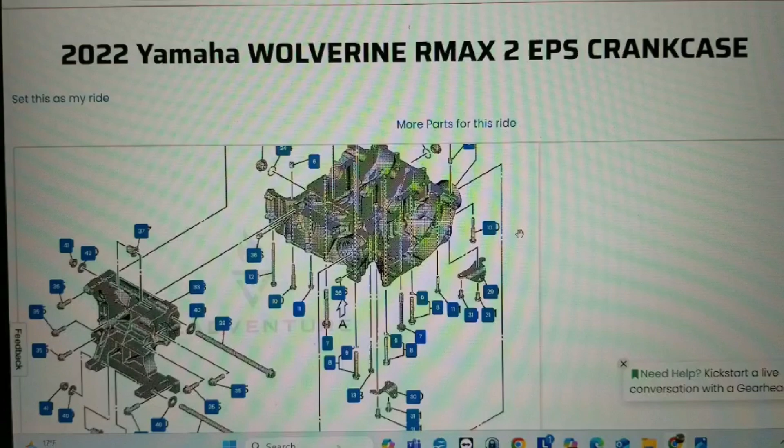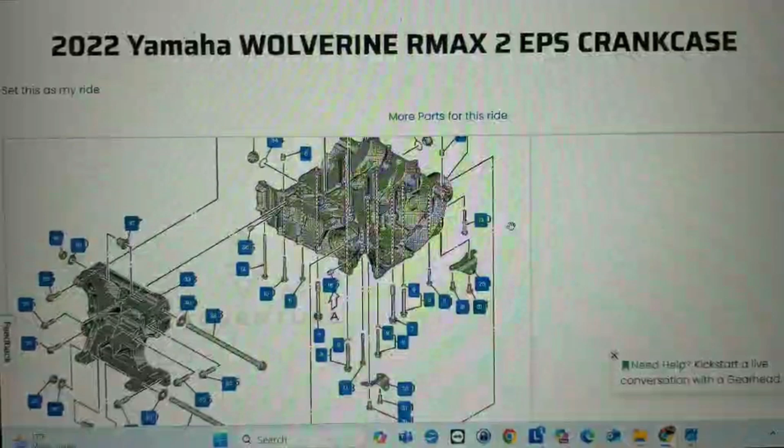So I got a 2021 Yamaha RMAX. I know this just says 2022, but at any rate, I got a rear crankcase oil seal leaking. It's basically between the rear drive line that comes out of the differential and goes forward into the crankcase, and that oil seal is leaking. So I thought I'd try to walk through this and make a little video of how you go about replacing that.

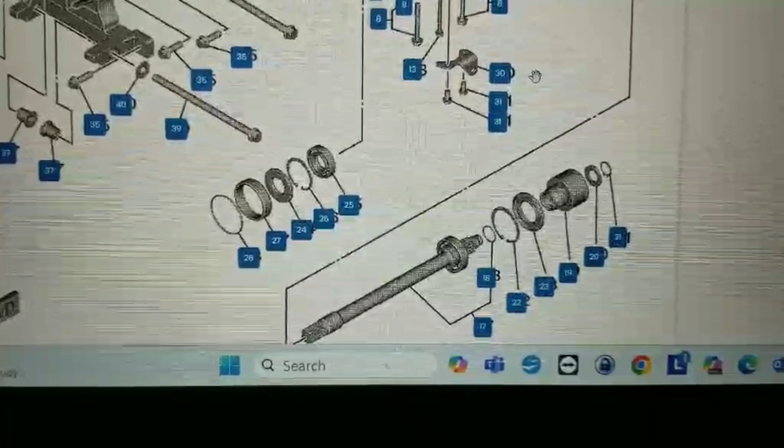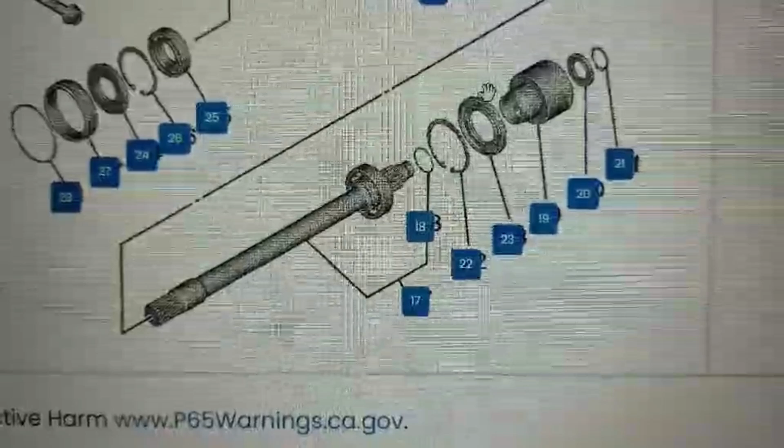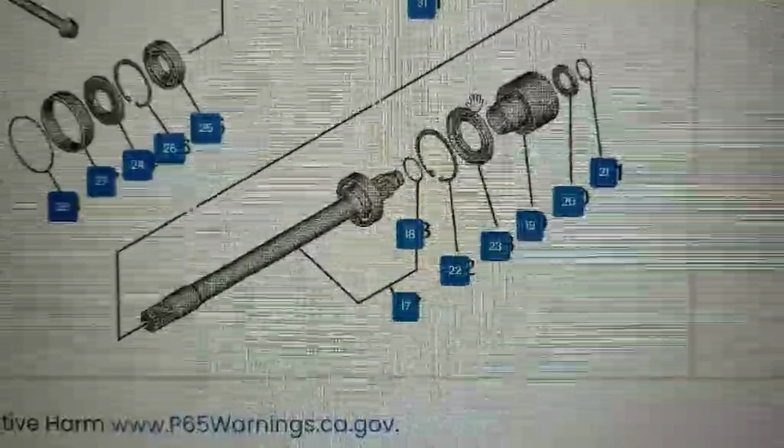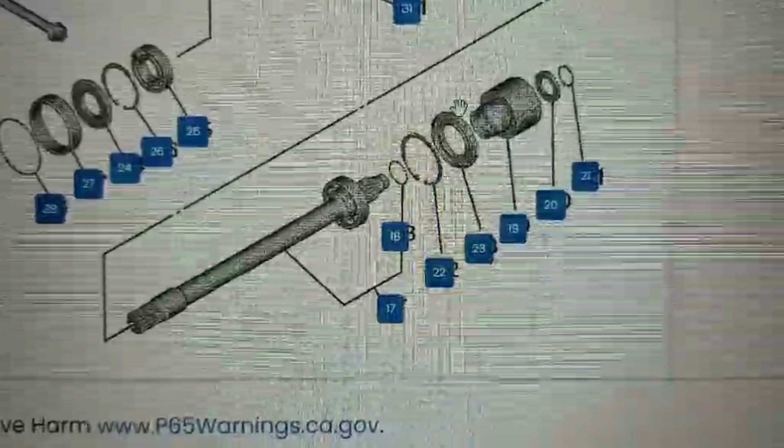Part number 23 is the oil seal. The service department recommended I also have part number 22 on hand, because they say oftentimes you bend the circlip when you remove part number 19. They also say I should replace part number 18, a little rubber O-ring, while I'm in there. So we're going to go out to the machine and see how this works.

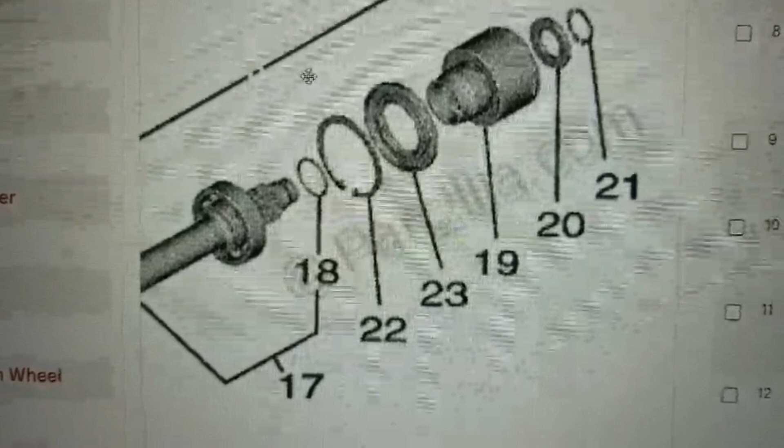Edit: you do not remove or need circlip number 22. You need to remove circlip number 21, the small one. They advise having one on hand in case you bend it taking it out.

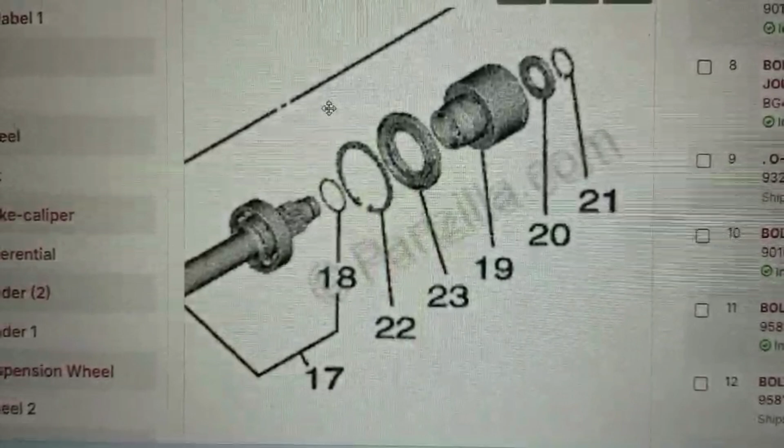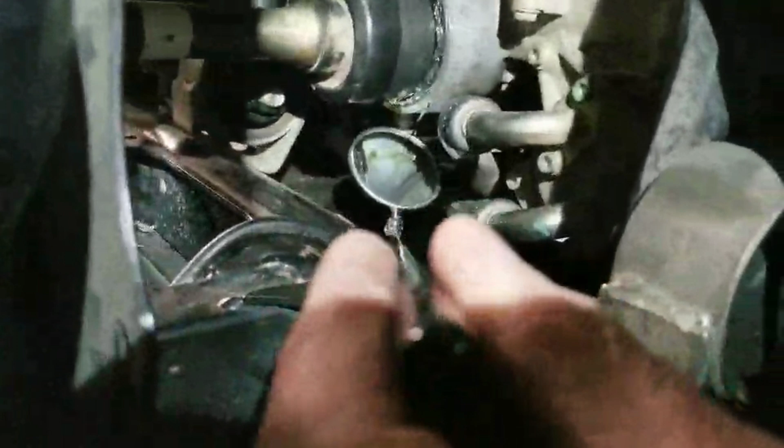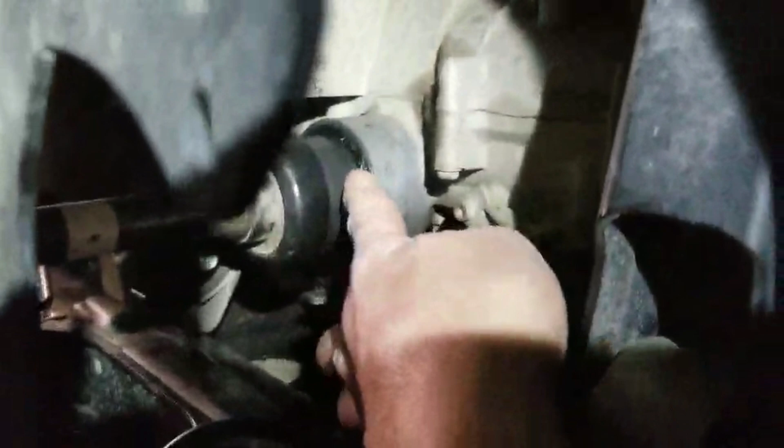This machine only has 800 miles on it, so it's pretty disappointing that that seal's leaking. Here's the rear diff, and there's the drive shaft that goes into the crankcase right here. You can see with the mirror it's leaking real bad right underneath that seal. That seal right there is what's leaking, so that's what I'm going to replace.

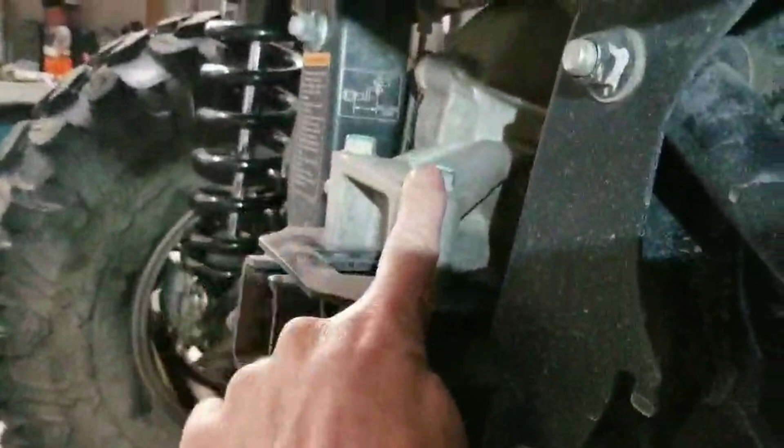Massive overkill said I just need to get this heat shield out of the way, take out a 10mm bolt, maybe take these brake line clips loose. There are only 4 bolts holding down the rear end, 2 on either side and 2 in the rear. Take those 4 bolts off, and apparently you just move the rear differential back toward the frame, and that gives you enough room to pull the drive line and access that seal. So that's what we're going to do.

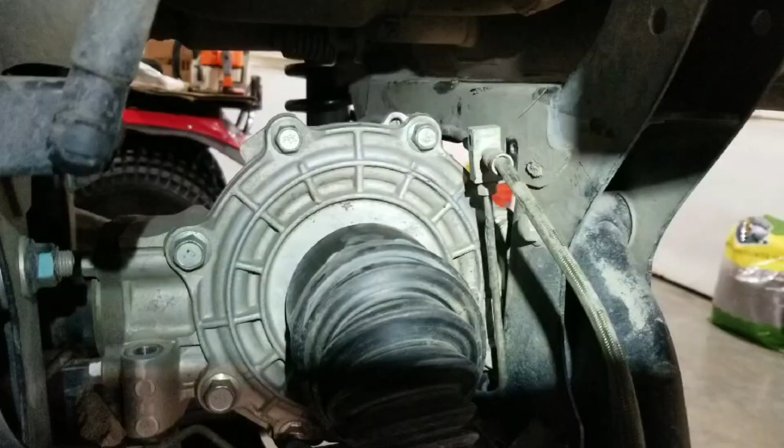Okay, so just like Massive said, you take this brake line loose with a 10mm bolt right here. You take a couple plastic clips loose, just squeeze them on the back side and they'll push through, to get this brake line out of your way.

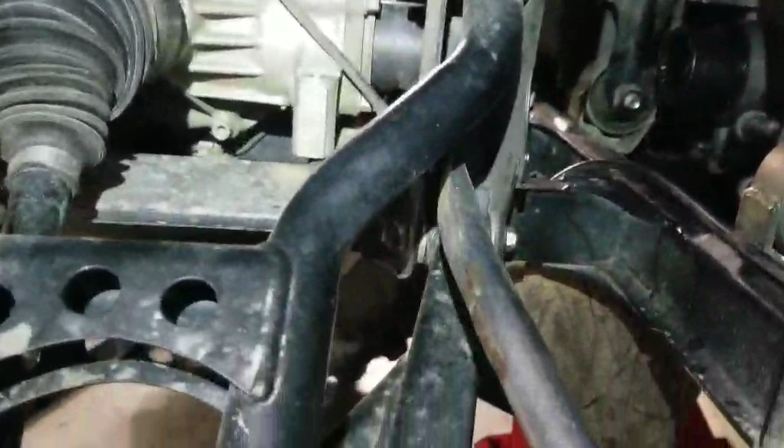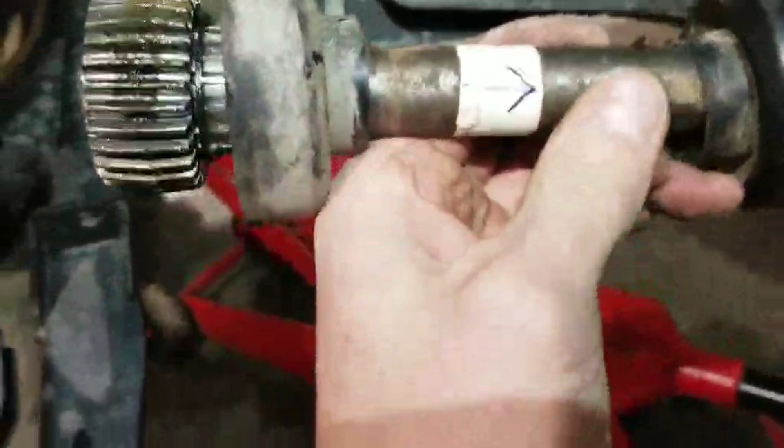Then I took the 4 bolts out of the rear diff. I used a pry bar right here against the diff, kind of wiggled it around, and got the drive shaft out. It's hard to see in here, but the drive shaft just comes right out. I put an arrow on it making sure it goes forward, though it looks like there's only one way to go anyway.

Now I guess I got to get in here somehow and get a C-clip out of there, so I can get to that seal and replace it. So that's what's next.

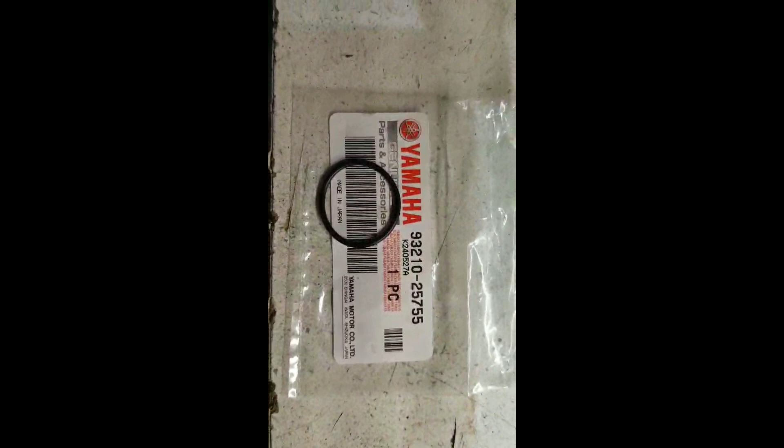So here's the parts. There's the seal—I guess you might even call that the rear main seal, it's a rear crankcase seal. They said better have a snap ring on hand, because sometimes you bugger it up getting it out of there. And there's that O-ring that goes on the output shaft way back in there. So I'm going to replace all 3 of those.

Okay, so I got the C-clip off. There's a C-clip that goes right on that shaft, in a little groove that holds this coupling on. It's kind of a bugger—you got to get your snap ring pliers in there, contort your body, it's a real bugger, but it can be done. Then you can take this hub out, and now I got to figure out how to get that seal out.

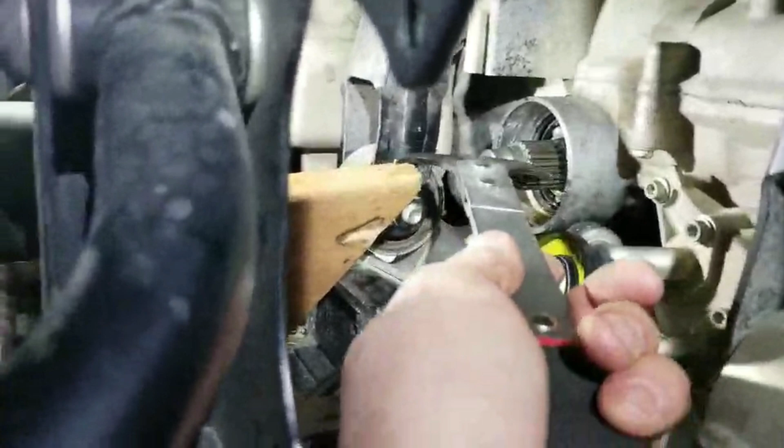Alright, that wasn't too bad. I used a block of wood, got my seal puller in there, and popped that sucker out. It wasn't too bad.

Okay, so the service department says when I'm in here, there's also an O-ring on that shaft—holding the mirror, I don't know if you can see it. There's a little black O-ring back in there on that output shaft. It says you should just replace that while you're in there. So I'm going to.

Okay, so this little hook tool is what I use to reach back in there and pull that rubber O-ring out off that shaft, and I put the new one on. Just showing you what I use, this little hook tool.

This is the new seal. Of course I cleaned up the surface, then oiled up the seal where the hub's going to ride on it. Oddly enough, this seal is rubber on the outside—I literally pushed it in with my fingers. It was tough to do, but I didn't even need to tap it with a hammer or a big socket. I could just push it all the way until it hit the lip, so the seal's all the way in using just my fingers and thumbs pushing as hard as I could.

Then I cleaned up the coupling and put a little grease on the splines and where the seal rides on the coupling. The coupling's going to go in just like that, and that's all the way in. Now I gotta get that snap ring back in there—that's gonna be fun.

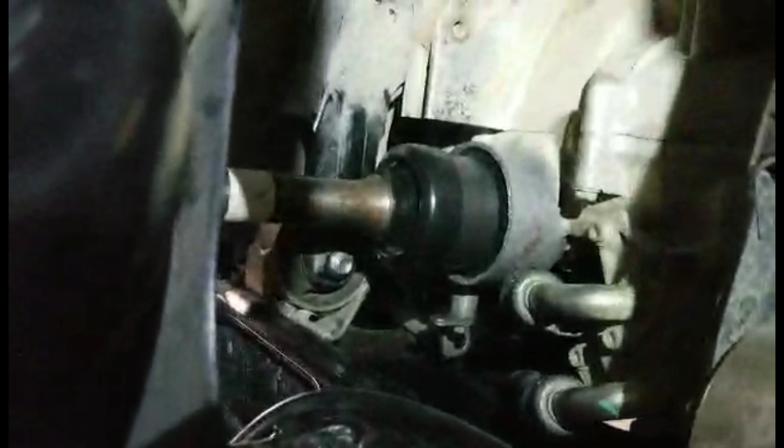Alright, she's done, got the seal back in. So like I said, you want to replace that rubber O-ring that's way back there in the shaft, and then there's the seal that was leaking. There's a snap ring that holds this hub on.

When you put these rubber boots back on, there's a groove this side goes in, and a groove the back side goes in. So make sure they're in the groove—front and rear, both boots need to be in the groove.

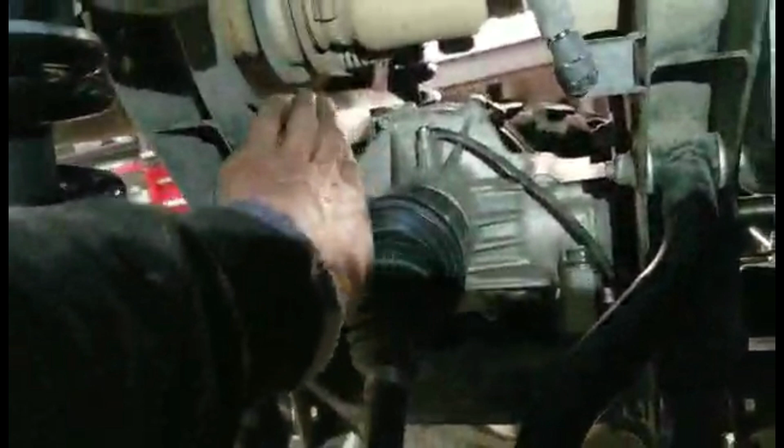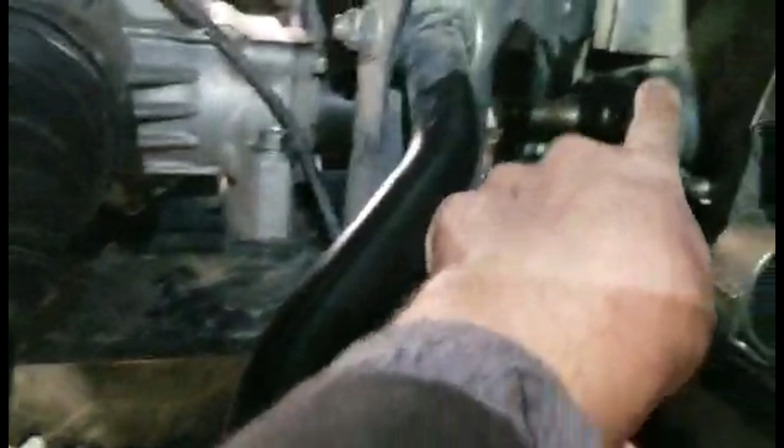Anyway, it's pretty easy. Remove this heat shield and the little brake line clips, pull the 4 diff bolts, slide the diff back, pull the drive line out, get your circlip out, get your hub out, get your seal out, replace the rubber O-ring, and do it in reverse to put it all back together. It really didn't take very long, so hope that fixes it.

And here's the tools I used: a seal puller. You definitely got to have a mirror, especially if you're a one-man show. It's hard to get the snap ring pliers back in there, you can't really see what you're doing. It's a big contortion to get back in there, but you can do it.

Here's a little hook tool I used to get that rubber O-ring off that shaft. Anyway, that's how you replace the rear crankcase seal on an RMAX 1000. Cheers.